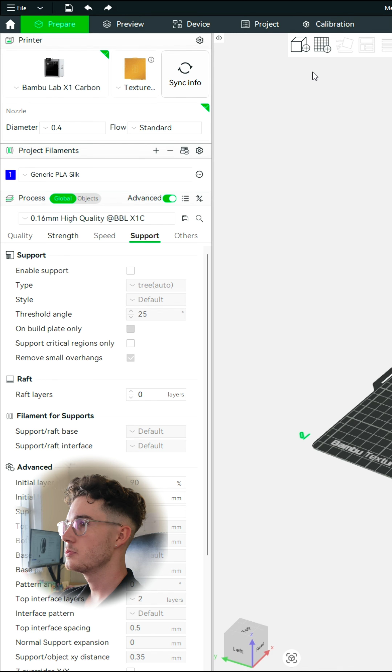Let's jump into it. Okay, so we've got Bambu Studio open. We're gonna start by importing our model. As you can see, there are some issues, so we can run a repair on this real quick.

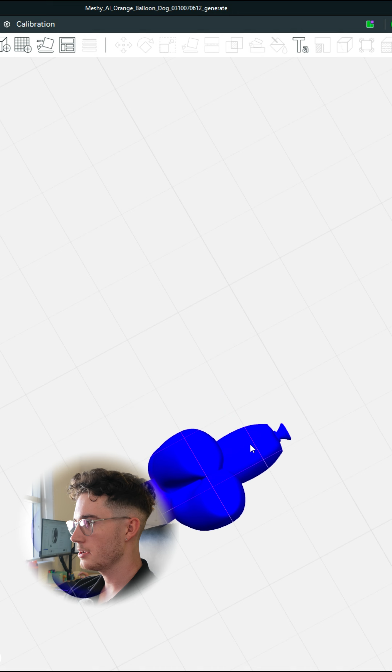All right, now that the model is repaired, we're gonna go ahead and lay this on the feet so that it's the right way up. Now, I've got a feeling because of the rounded surface under here, it's going to try and chuck some support around this area. So I think a really simple and easy way for us to get a nice flat surface will be just to cut those feet off at the bottom.

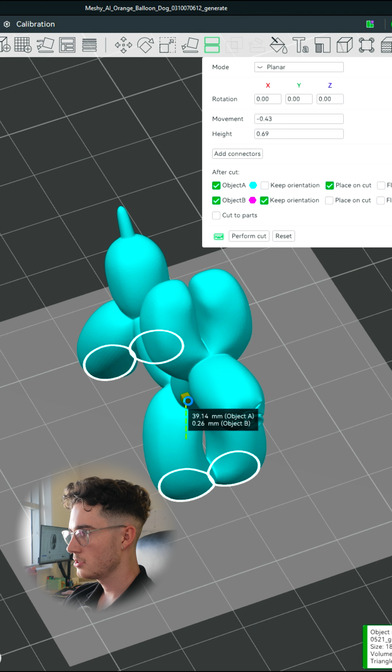So we can go ahead and select our model, then use the cut tool here. We can drag this down until we get it to a position that we want. So I think somewhere around here should be good. Then we can perform the cut. So we can go ahead and select the feet and remove those. Now, as you can see, it's still really a little bit too small for what we want.

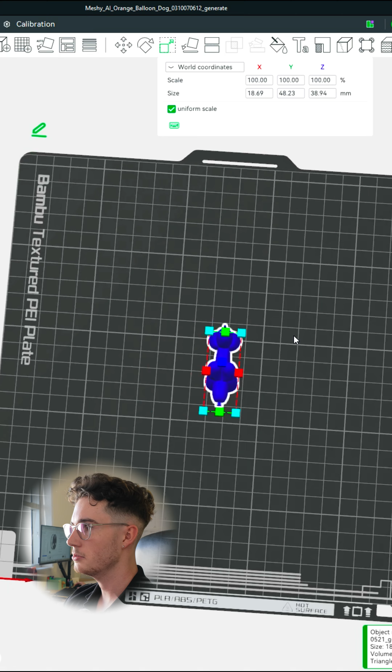So select your model, then come to your scale up here and make sure uniform is on because we want this to scale globally. And then we can go ahead and select what our dimensions are that we want. So I'm gonna go for around 23 centimeters. Boom, there you go. You can see he's a lot bigger now, but obviously he's out of bounds on the build plate. So we can go ahead and select the model and auto arrange it. So that looks really, really good.

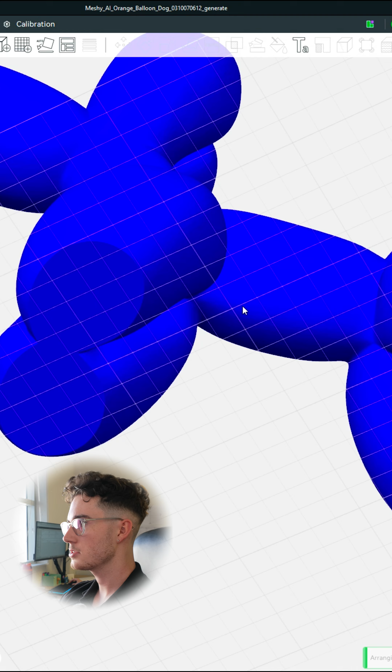Next up, we need to address the supporting regions. So you can see we've got some floating areas here, floating areas here. So obviously the printer can't just print on air. So we need to go into our support setting, enable supports. I'm gonna use tree supports for this one.

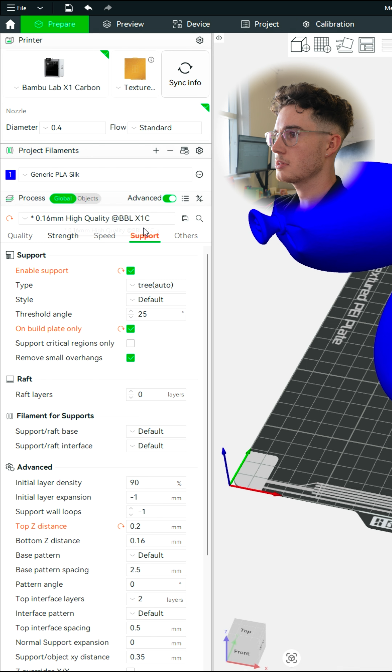And we can go ahead and mess with our top Z distance just to make them a little bit easier to remove. I'm gonna go with a 0.2, see how we go with that. I'm gonna stick with a 0.16 layer height as well. And I'm just gonna drop down the infill just to make this a little bit quicker. So we're just gonna reduce that down to 10%.

And hopefully, if I've done everything right, we can run the slice. Okay, so you can see the slice was successful. And yeah, let's go get this thing printing.

All right, so for this project, we're gonna be using Raw3D's Chameleon Nebula Purple. This is one of the new filaments that we've just got in, and I think this is gonna be perfect for the project. I mean, look at that color, it's crazy. All right, let's get this thing loaded up on the printer.